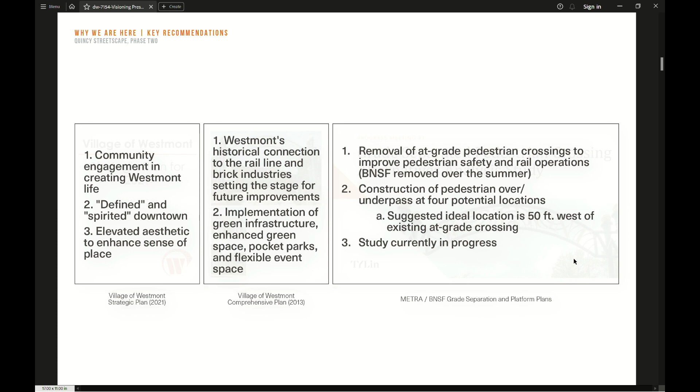All right, so we will look at what we've done already. It all kind of kicked off with James Addington Plaza - a beautiful plaza. It was great to drive up and see it all lit up, awesome holiday stuff happening here. That really set the tone for kind of inviting a refresh of the existing conditions and streets.

What kind of furniture we'd like to use, make it a little more modern. Phase 1 was started in 2021, wrapped up in 2022, and I believe substantially complete in construction just a few weeks ago, last week. Also looks great, did a lot of work, and very happy with how it looks from the quick walk up. And now we're moving into phase 2, which is the next 2 blocks west of Quincy.

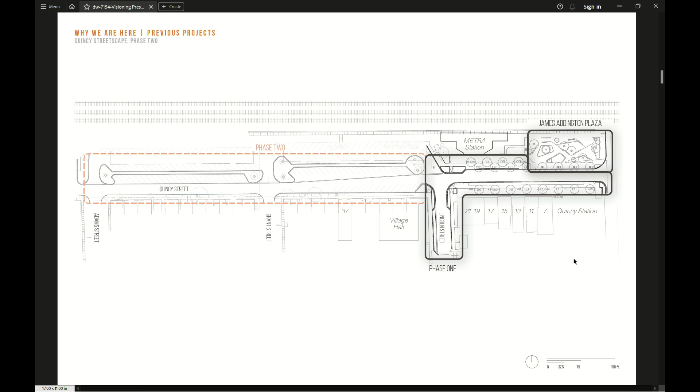Lincoln Street excluded, but Grant Street and Adams Street included. We will look at the parking lot, part of the parking lot there, trying to give a nice upgrade to it so that it's better access for pedestrians, better parking for vehicles, and potentially gathering spaces for the public, the stakeholders, and the residents.

We're looking at the scope of work, a little zoomed in of the area. It's right out this window—it's dark out, I'm losing my bearings—but this block of Quincy, half of the parking lot, Lincoln Street excluded, the intersection of Grant Street, the intersection of Adams Street, and the blocks between.

Quincy is a little atypical. You have a one-way for one block and then two-way for the westernmost block. So there will be some challenges, but nothing that can't be overcome.

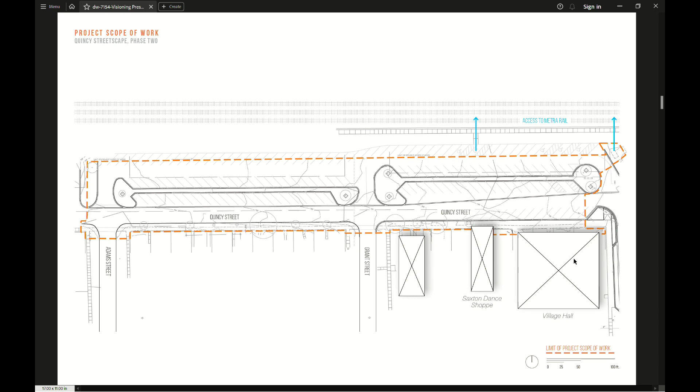As part of phase 2, this is where the engineering comes in. We'll be looking at underground utilities. Storm sewer is a big thing, especially in the village. We'll make sure the proposed storm sewer design meets minimum requirements, if not larger, depending on what storm events we need to model for.

As you go east to west, I anticipate that storm sewer network will have to increase in pipe diameter, but we need to dig into that a bit more with hydraulic modeling. I believe we also have water main services that will be upgraded along these two blocks during design, to make sure it's all encompassed in what we want done here.

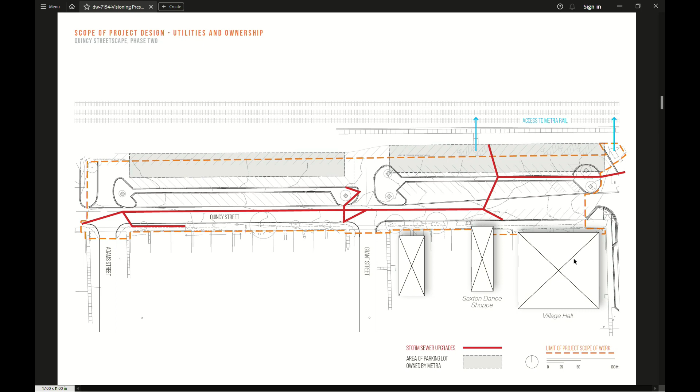The medians at the parking lot—we're looking at changing those a bit to allow for better pedestrian access, better sidewalks, better walkways, and easier ways to get to and from the train station across the street. We'll also look at parking, and we'll talk about that more later. This gives a good idea of the underground work. Everybody sees the streetscape surface and loves it, but it's the underground that really matters and helps make your infrastructure more sustainable, with better longevity.

I just want to make sure I'm not over-talking you, Anisha. I feel like I might be. No, it's okay, you can keep going. If you want me to cover this, it's fine. It's okay, we'll go here.

So we've got the timeline on the board. Here we are today, December 7th, the visioning workshop. We're here to present our ideas, what we've been working on up to this point, and gather your feedback. We'll take all that feedback and group it strategically so we're seeing the main key factors. Once we have that, we'll take it back to the offices, to the drawing board, revise these concepts and opportunities we're showing you, and work them into a preferred alternative to share with the village public works.

We'll gather feedback from public works, go back to the drawing board, and tighten it up a bit more—make it a nicer looking, more feasible and reasonable design—and then come back to the village, this time presenting to the village board, talking through what we want to do. I believe that is where we're at in February and April.

Once we have that last bit of feedback from the village board, we'll come back for another public meeting with the village, the stakeholders, and the residents, to give everyone an opportunity to understand the story of how we got from December 7th to this point in April with the preferred concept, and gather last feedback to make as many people happy as we possibly can.

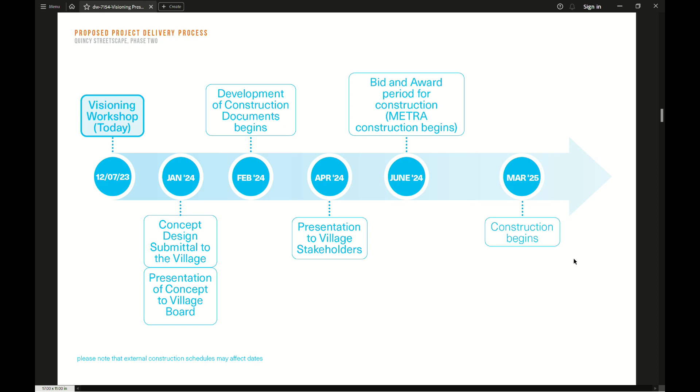We have a short presentation for you that talks about some of the initial ideas that we've had. But the goal today is really to hear from you all what you would like to see in this space, these two blocks. What are some of the things that you're missing in the downtown that we could potentially accommodate here? So by no means, even though you may see some design ideas, they're very early sketches and nothing set in stone as of this point.

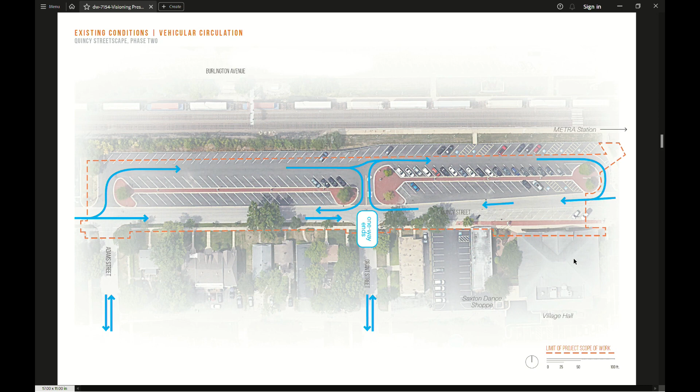So the existing context, the red outline really shows the area that we're going to be looking at. That's the project scope of work. The blue lines here clarify the circulation, as Chad mentioned a little bit earlier, that the circulation with one-way streets and two-way streets is a little complicated. So we wanted to make sure that we understood for ourselves how this all is going to work, and how we can make the circulation better with some of the concepts we've come up with, initial ideas that we've come up with.

Here is an entire parking diagram of available parking. Yeah, Chad, you and I want to talk about this a little bit. Sure. So as part of the Phase 1 study, we did analyze existing parking.

We looked at these segments here, but also a little bit further to the east with the Phase 1 area parking, and then even across Cass Avenue a little bit on Quincy there. And what we did, we had staff members come out for 4 hours in the morning, a couple hours over the midday, and then 3 hours in the evening during the peak hour travel events.

Usually peak hours are 7 to 9 in the morning, and then 3 to 5 or 4 to 6 in the evening. What the staff did was just walk through all the surface parking areas and make a count of whether each parking spot was occupied or available. And then over the course of all those hours, which I think we had 10 hours on the weekday, we even came back over the weekend during the lunch period, 11, 12, 1, 2, and did another count and captured all that data.

The understanding is your surface parking, your existing parking, is underutilized. And I know this sounds weird, but 85% is usually the percentage we're looking for. If you're making 85%, typically that's seen as a fully utilized parking area. If you're under that, it's a little underutilized. If you're over that, you're starting to look at a parking problem. You may need to come up with some solutions.

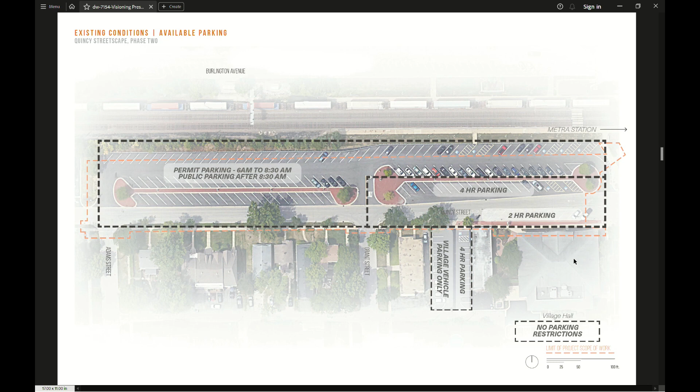The parking lot over here is half split with 4-hour limited parking, and then village vehicle parking. And then behind Village Hall, we didn't see any parking restrictions, but it is, and you'll see on the next slide, very well utilized. So you can see how we broke this out into smaller zones to make it easier to read and digest, partially for the public, but mostly for us as engineers. So it's one of the few times where we're starting to agree a little bit, I would imagine.

What you can kind of see is a total parking count, the times of day that we were noticing they were full, the peak utilization, and what that peak utilization was. So in the western half of the parking area, the parking lot that's across the street, 12% on the northernmost and 9% on the southernmost was the max utilization we saw in that parking area. The peak hours being weekday midday or AM peak hour, which does start to coincide with that permit parking.

And then directly across, we're seeing the most utilization right next to the station, which makes sense. Closer to the station, people want to park there, with an 86% utilization at the AM and midday peak hours. So cars are coming in the morning and staying pretty much all day. What we were noticing in the afternoon is that utilization drops off pretty fast before that evening peak hour hits.

And then the zone right in front of Village Hall, 33 spaces, angled on both sides, the north side and south side of Quincy. 9% utilization, with the highest utilization time in the midday and PM peak hour.

The parking lot just west of here, 25 spaces, 32% utilized, mostly in the weekday PM peak hour. And behind Village Hall, almost all day, 76%, pretty good utilization there, which makes sense since a lot of people are parking and coming around. 149 parking spaces total, and 10 ADA spaces collected, and we're not looking to reduce that number with the proposed design.

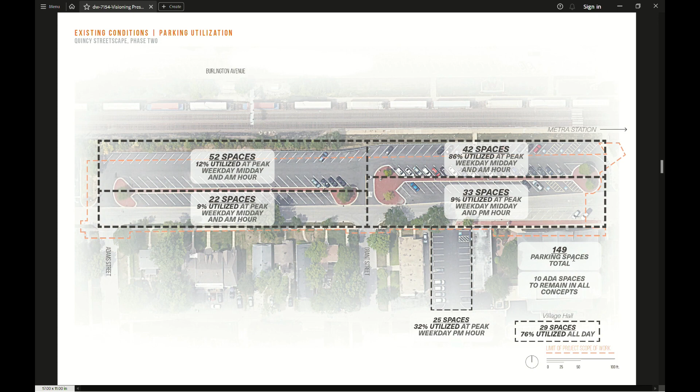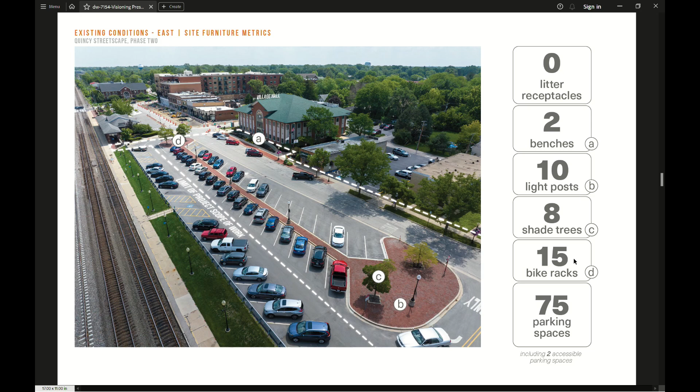This is one of the things we try to do at the beginning of every project, establish benchmarks of where we're at, what the baseline is. Because our goal, when looking at how to pedestrianize a place and make it more comfortable for public use, is figuring out how we can increase these metrics to improve the pedestrian quality and utilization of the space.

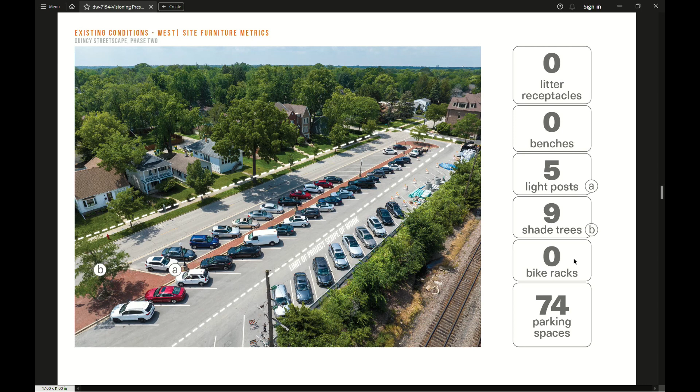On the west side, the metrics are: no litter receptacles, no benches, 5 light posts, 9 shade trees, no bike racks, and 74 parking spaces, totaling the amount Chad just mentioned, 149, if I recall correctly. And in front of Village Hall, the site furnishing metrics are 13 parking spaces and 2 light posts.

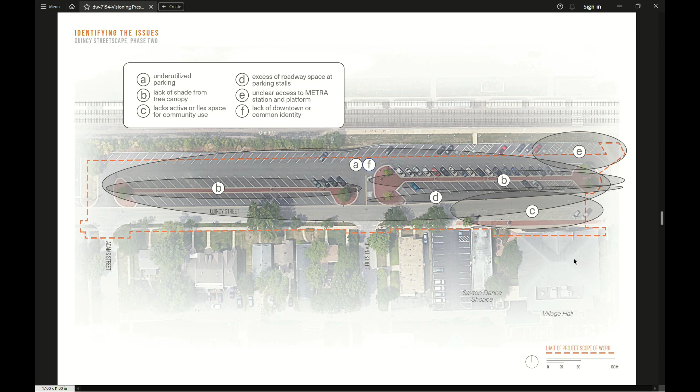Some of the things that came to light as we looked at these existing conditions was really trying to understand the issues we're seeing. One key point, which Chad mentioned too, is that a portion of the parking areas are underutilized. There's also a lack of shade in areas where we might consider creating public flexible spaces or amenities. That would be one of our goals, to look at increasing tree canopy and creating a cooler environment for pedestrian comfort.

The other thing we see is generally a lack of flexible space. You may have seen in some towns and villages around you flexible spaces that communities have created to support different activities, whether it's farmers markets, movies in the park, car rallies, or car shows. So how can we provide spaces here that support all of these activities that could really help build community and bring people together in your downtown.

The other aspect we looked at in the existing conditions is identifying where there's excessive paving. How can we take some of that paving away to provide more green space, be more sustainable, and create more comfortable conditions? There's also, at these two blocks, a bit of unclear access to the Metra station and platform. As you may have seen in phase 1 with James Addington Plaza, we're trying to build an aesthetic quality and identifying quality for the village in terms of design aesthetic and material use, so the goal is to bring a cohesive identity across downtown Westmont - same materials, shade trees, benches, and light posts - so when you're in different parts of downtown, you know you're within the village limits and there's a consistent aesthetic quality.

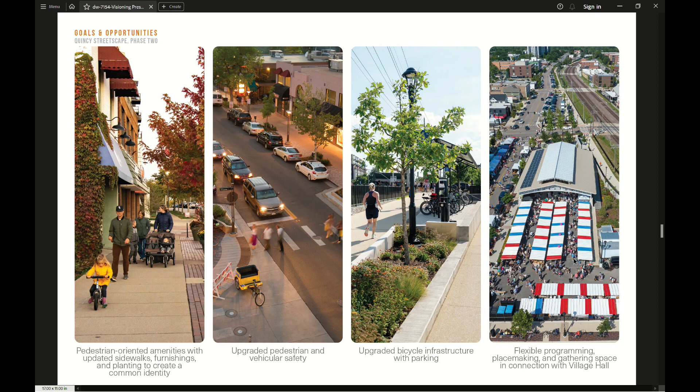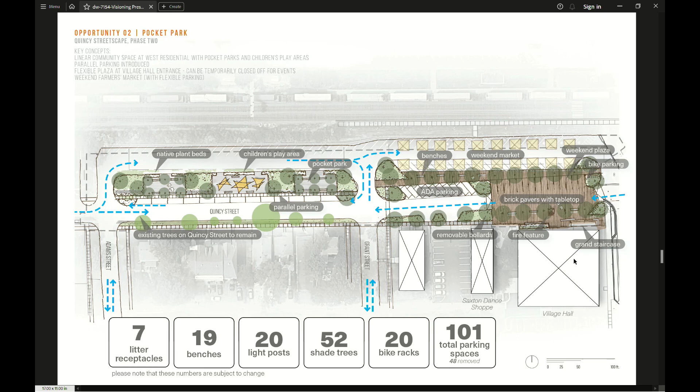So it still maintains ADA parking and the other parking. As you can imagine, in order to create more pedestrian areas, plazas and green space, we've had to take away a little bit more parking. In this option, the amenities possible can be litter receptacles, benches, light posts for safety, shade trees — this one actually has more shade trees than the previous option. It can accommodate more bike racks, about 20 bike racks. It does take away about 48 spaces and still accommodates 101 spaces in and around this area. The vehicular circulation that was existing previously remains the same, with the one-way and two-way streets functioning as they were previously.

So then the village challenged us, saying, what would we do if we had to completely re-envision this space in front of City Hall? What possibility might there be if we had to create a green space and a public space that really reimagined, created more opportunities, created an event plaza, an opportunity to have a multi-use structure that can be used for a variety of events? How might that option look like?

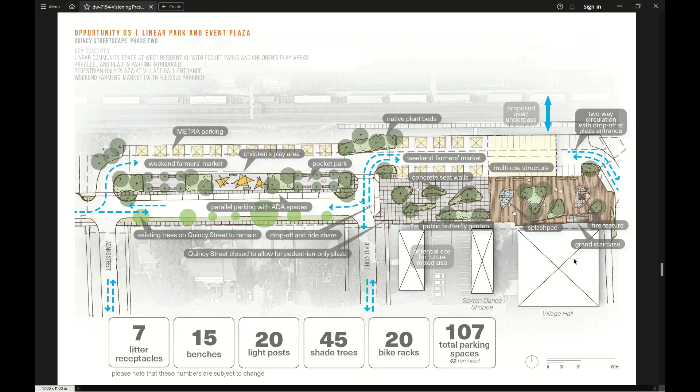Yeah, please do, that is totally acceptable. In terms of bike amenities, part of Phase 1, there's an area striped out for a future bike lane. In evaluating the existing bike plan, there's not a ton of information or direction on adding bike lanes or shared bike usage along Quincy Street, mostly Cass, north and south. But we will definitely work to ensure there's space for a future bike lane if and when that becomes desirous.

The 20 bike racks, the old traditional one is- these are the new modern ones. How many bikes would park at a rack? How many bikes could be parked at a single rack? 20 bike racks, or bike racks for 20 bicycles? 20 bikes, which you will have two in each direction, and they'll be stationed throughout the area. That's right, good.

What about charging stations for electric vehicles? We have, part of Phase 1 has provisions for charging stations to be along Lincoln Street. But as part of Phase 2, we haven't delved into that too deeply. We can certainly work with the village to look at where it would make sense for EV charging to go in.

I see Amy creeping up, so I feel like she's got something to say here. Just let me add that there's a lot of conversation about wanting to do that. The hard part is picking the right location, and I was hoping you had more experience than we do in picking that right location, unless Amy has that answer.

Well, it was part of the presentation we were going to give at the last board meeting, which we kind of ran out of time for, so we'll be resuming that at a future meeting. We're going to present some different considerations to do with EV charging, and some ideas to make it cost neutral for us by having a partnership with a private firm that will identify the best locations for these. They will install them, they will maintain them, they will handle all of that. So there's options to do that, and there's options to own and maintain them ourselves. But there's benefits and drawbacks to each of those options. We'll be talking about that more and how to proceed at a future meeting.

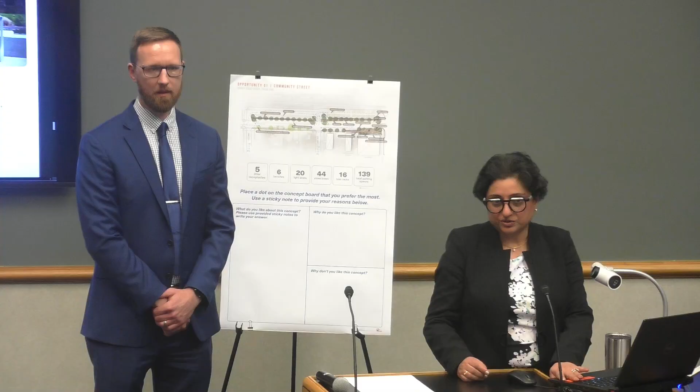Here are a couple of examples that the village is considering to make sure that the lighting is compliant with dark sky. Right from the onset of the project in James Addington, the village has been advocating for wanting to be considerate and look forward into the future in terms of sustainability and light spillage. So these are some of the options the village is considering, in case there is a change of light pole direction, some of which can be dark sky compliant.

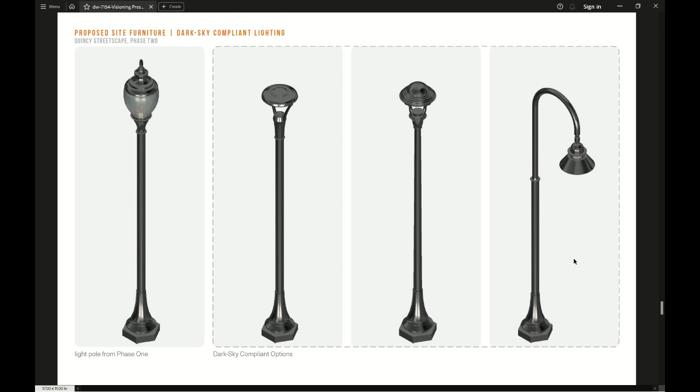I don't know, Manager May, if you had something to say. Well put, especially the part that we've been bugging you about for a long time. Yes, I conveniently omitted that part.

So I guess we're at a stopping point where we'd really like to hear more from you about what your expectations are about amenities, about spaces. I know you have expressed concerns about parking areas, or taking away parking areas. Are there other things that you feel like we haven't looked at and we should be considering, or what do you hope to see? This is really an open discussion, because our goal here is to really hear you.

Krista Stanulis again. I'm actually a member of Westmont's Environmental Improvement Committee. As you mentioned, dark sky fixtures, it's interesting that's been in discussion since James Addington Plaza, because I guess it's something we've been talking to the village about since 2018.

Since that time, we have 31 or 32 new Acorn fixtures in town, the majority in the Quincy area and in Addington Plaza. We understand Westmont is reconsidering what to do with the light fixtures overall, but as the EIC, as a group, we want to recommend that you consider dark sky fixtures for all these projects moving forward.

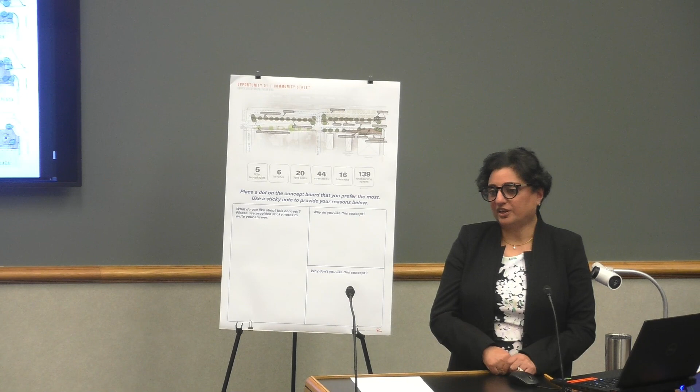That's a really good point, and thank you for that comment. Of course, as we think about what exact amenities get integrated into the preferred plan, we'll be thinking about those amenities, how to make all of it work - if a restroom consideration needs to be had, et cetera. Thank you for that comment, we'll make a note of that.

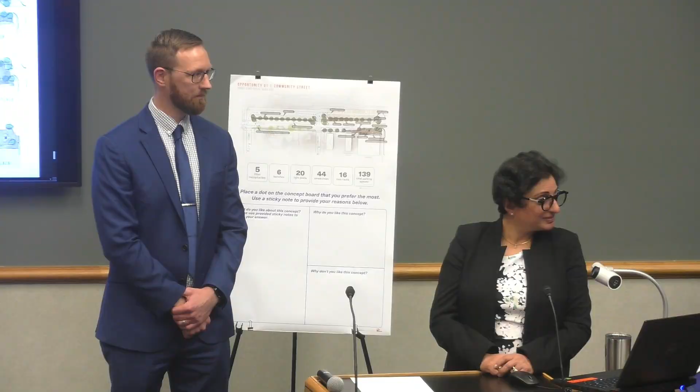What are we missing? Trustee Barker, who's the chair of our most aggressive and active committee. They do a lot of work. Aggressive - oh no, I didn't mean aggressive, I mean you guys are the most committed committee. It's a very good committee. I'm proud to be the chairman of that. I shouldn't have said aggressive, but you are very knowledgeable. I like the good-looking group. Yeah, good luck.

So when Addington Plaza was finished, I went over there with my grandson, brought some local bakery with me. We had a great time. We went over and played checkers, because I thought a 4-year-old should learn how to play checkers. Are there parks or people doing this in this area where they have a fixed table? I brought my own, because I knew there wasn't one there, but if there was a fixed table, it's ideal for lunch or coffee or muffins or whatever. And that's the park I want to go to in a couple of years when I retire. I agree the concrete was a little bit hard, but I brought a pad - not one for him because he's young, but I brought my own pad and my own table. But if the table was there, people might enjoy something a little more unique - checkers, chess, whatever. Video gaming, you can probably do that there too now. Just adding that to the conversation.